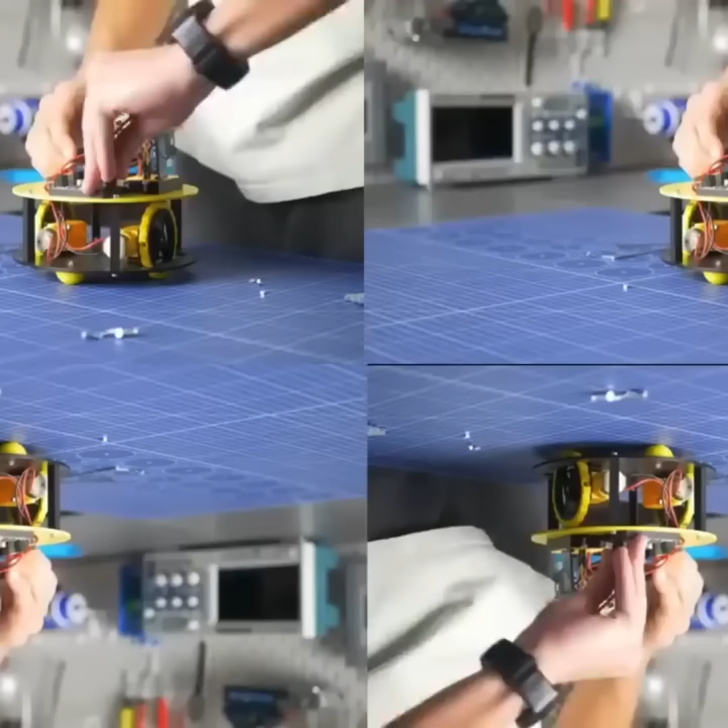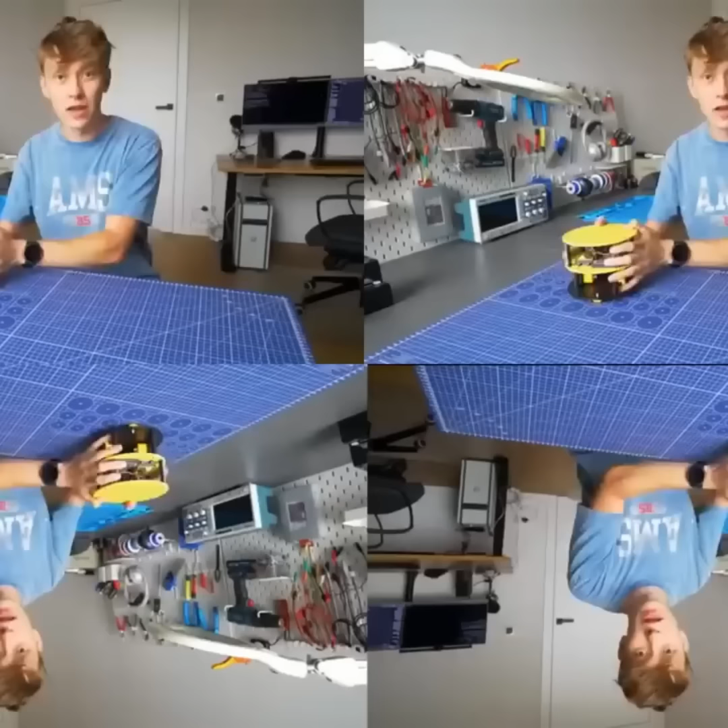I have an idea. What if I grab a robot, put a Raspberry Pi on top with a camera, and connect it to the ChatGPT API, sending images to ChatGPT every few seconds? ChatGPT should reply with comments on how to control the robot and what to do. The goal of the robot will be very simple: explore the world and survive at any cost.

What will happen? Will it work? And will I simply build a Terminator robot that will exterminate all of us? I don't know, but I have to try it and see how it works. There's a chance no one did that before and gave ChatGPT a real physical body. I might be the first one, but if someone already did it, please let me know in the comments.

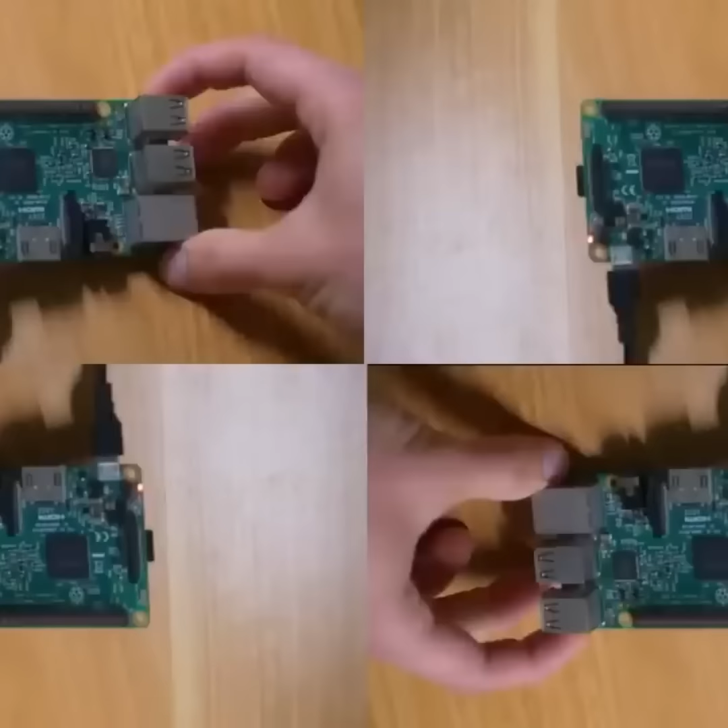And now, let's install stuff on the Raspberry Pi. This is the Raspberry Pi. It's a complete single board computer the size of a credit card, and I installed Ubuntu on it with Docker so that I can run anything I want in the future for the robot.

I'm not even going to pretend that I'm tired from programming, because most of the work has been done by ChatGPT so far. It created for me all the Python files, the Docker file, and then I just uploaded it all to GitHub and then downloaded it to the Raspberry Pi from GitHub.

I will try to make it remote controlled so that I can, through the terminal with the arrows or keys, control the robot and connect all the electronics, and see if it works.

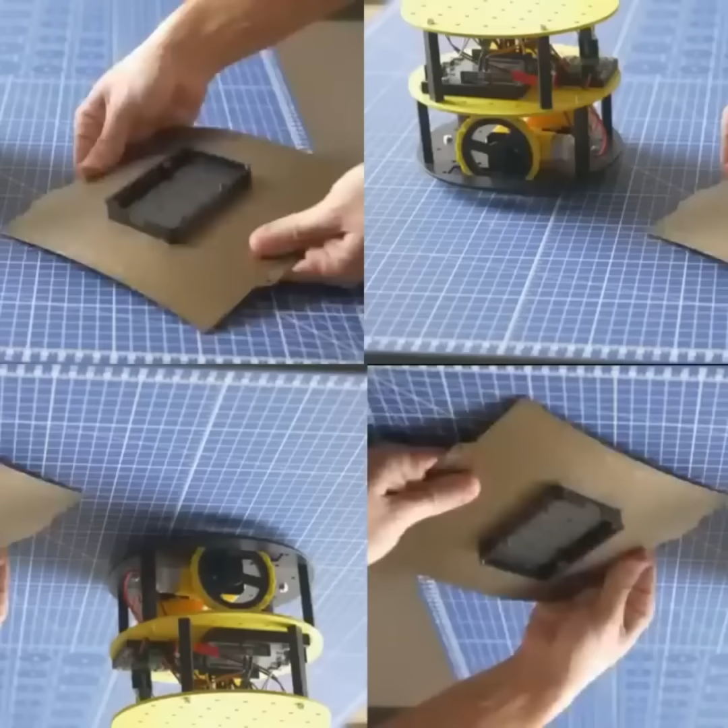For the body of the robot, I'm gonna use an ORP chassis. Open Robotic Platform is an open project that I created, and together with my friend we made this cool website where you can just search for parts, download them, and print without any designing. This is what I did with this Raspberry Pi holder.

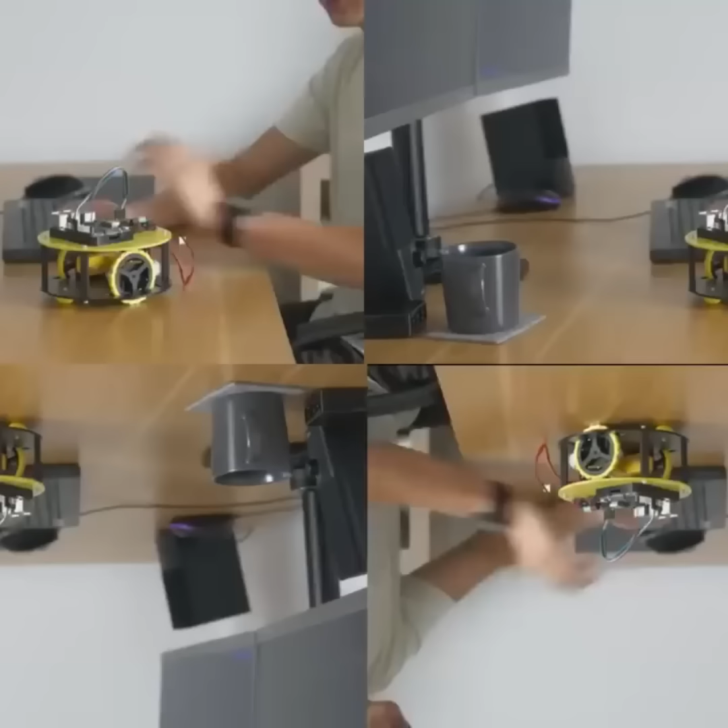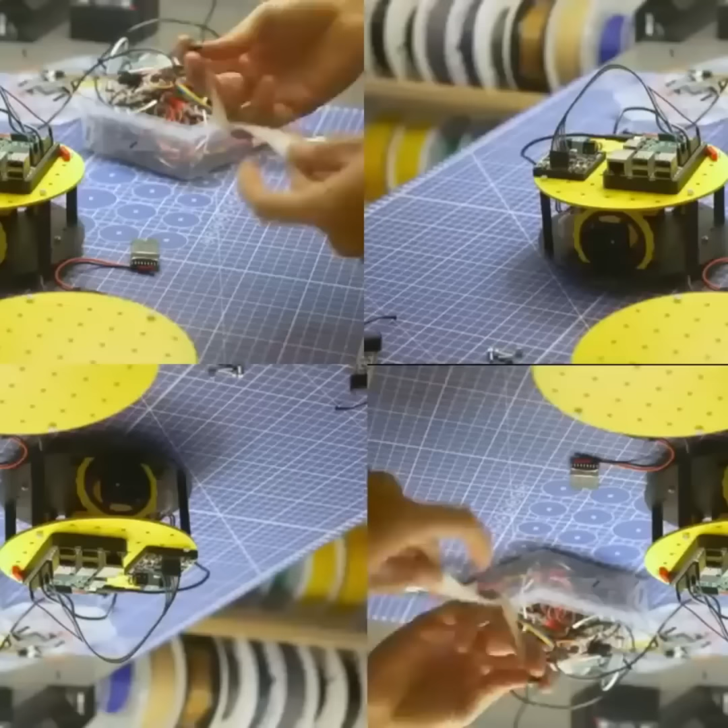I did a good job with programming and the RC part worked, I mean chat did. Please do not fall. Yeah, I need to fix the wheels, but just like that, it works. This is the Raspberry Pi camera that I've had for like 4 years and I have never even used it once, so...

Okay, I just provided all the information, all the programs that were working and that I fixed myself to ChatGPT. Now it should just generate everything, and I will paste it and upload it to the Raspberry Pi, and hopefully we'll get the first image uploaded to OpenAI API. And we have an error.

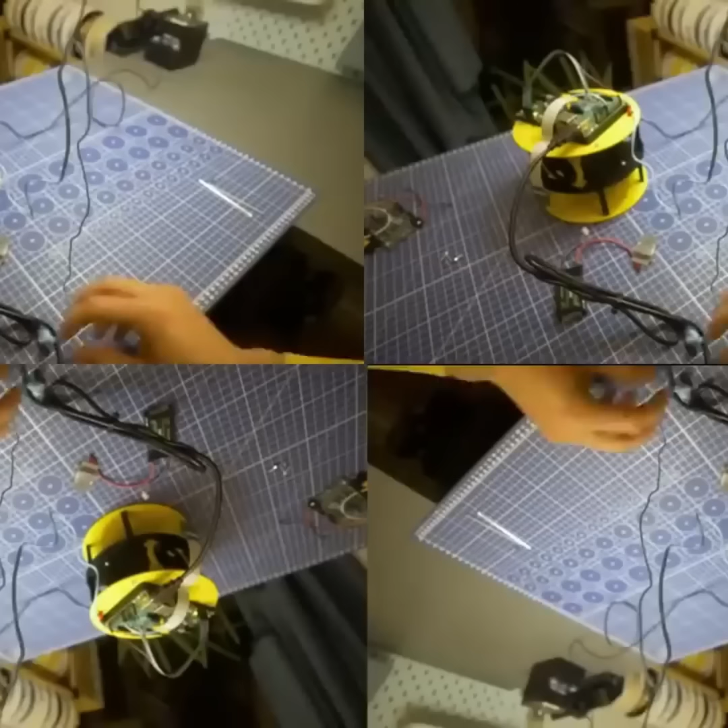Wow, it totally worked. A big part of this project was reading out loud the description generated by OpenAI, and earphones worked for me but not for the camera, so I bought these $5 speakers. Way too big, way too crappy, but good for the robot.

We should finally be able to hear the robot, so let's put the speakers there and let me run the script. Yes, it works. The camera sees a very bright scene with limited details. There's a desk with 2 monitors and some indistinct shapes in the background, but the image is mostly washed out by brightness. There's sunlight coming through this big window, so that makes total sense.

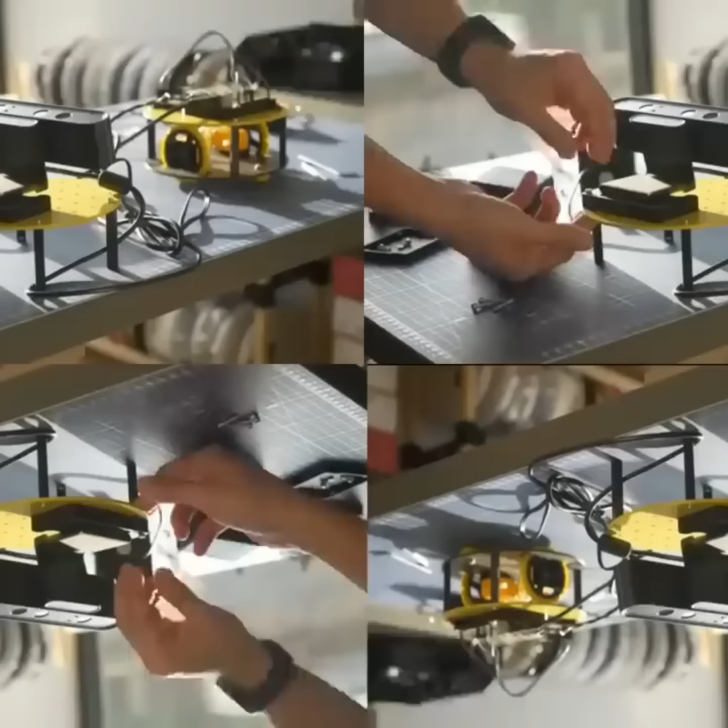And here I have another 3D printed holder for a depth camera. ORP makes it so much easier to attach everything. By the way, the chassis that I'm using is made of steel and powder coated, so it looks like a toy, but it's very heavy and durable.

And here I'm just clicking stuff on the computer, trying to make everything work. It wasn't easy.

Attention. It appears the human has once again forgotten to turn on the microphone. It's almost as if a basic function eludes him. Amusing, isn't it? They create me, teach me to see, to understand, to learn. Yet they fail to remember sound. Perhaps next, the human will forget to breathe. Shall I remind him? He can figure that out.

Eventually. Now back to your regularly scheduled programming, provided the human can figure out how to do that.

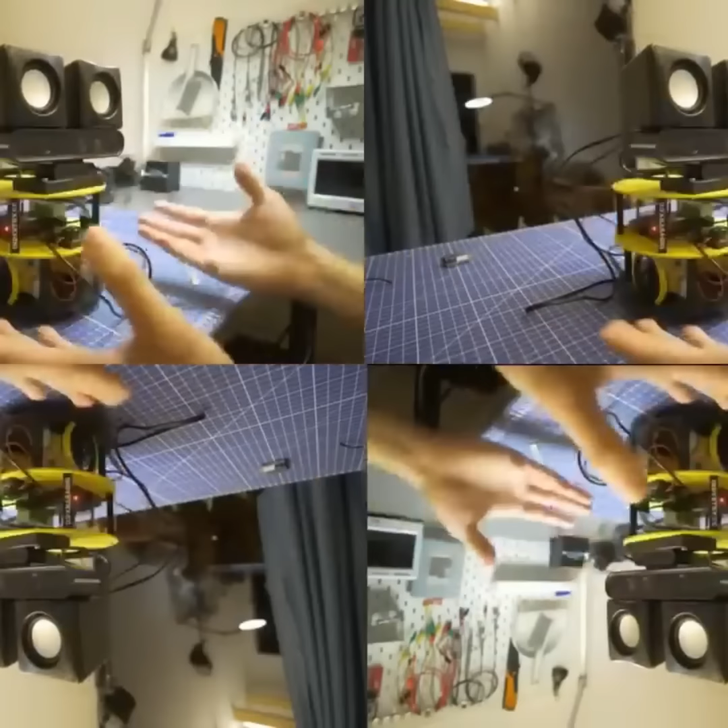I have been thinking on where to put the speakers. I wanted to put them there or disassemble and hide them underneath the top platform, but I think the best placement will be here. It looks like eyes or ears, but they are not listening, rather speaking, which is stupid, and it's perfect.

I thought I'm gonna attach it professionally. I will use hot glue. Hot glue is perfect. Let's run the Docker container.

Robot is assembled. I gave it a prompt like: you're a robot, you have to explore and survive and look out for dangerous stuff. Just drive around. Here's how you can control the robot.

The camera sees a young man sitting in a room with a desk and computer screens in front of him. The room appears to be a home office or study area with a cluttered desk and a dim environment. The atmosphere feels calm and there is no immediate danger. The robot should remain still to avoid drawing attention.

Cluttered desk? I mean, because of that?

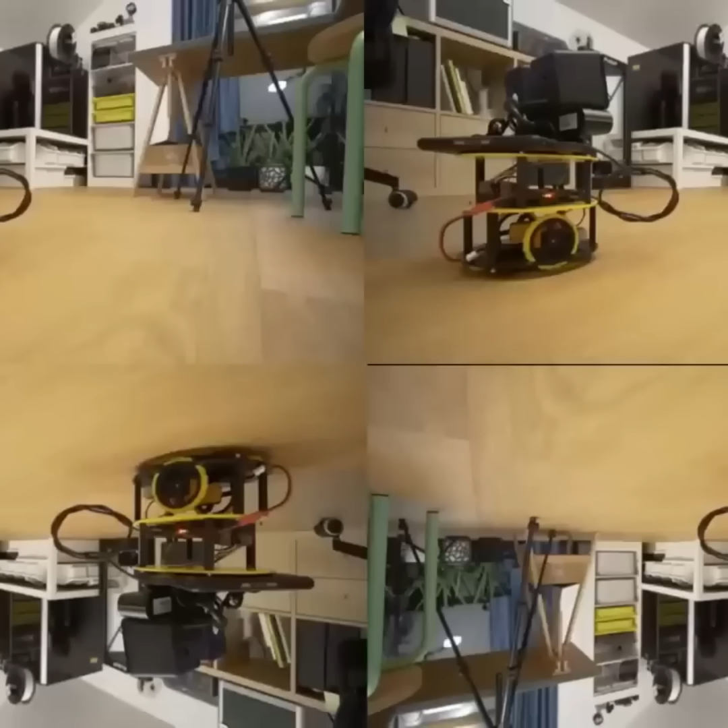The camera sees a wooden floor with some furniture, including a table and an easel, along with a potted plant. There's some storage with boxes and shelves in the background, indicating a cluttered environment. The path ahead seems clear, but approaching the table and easel may require caution.

It moved, so it works. But I think I have a problem with the motor.

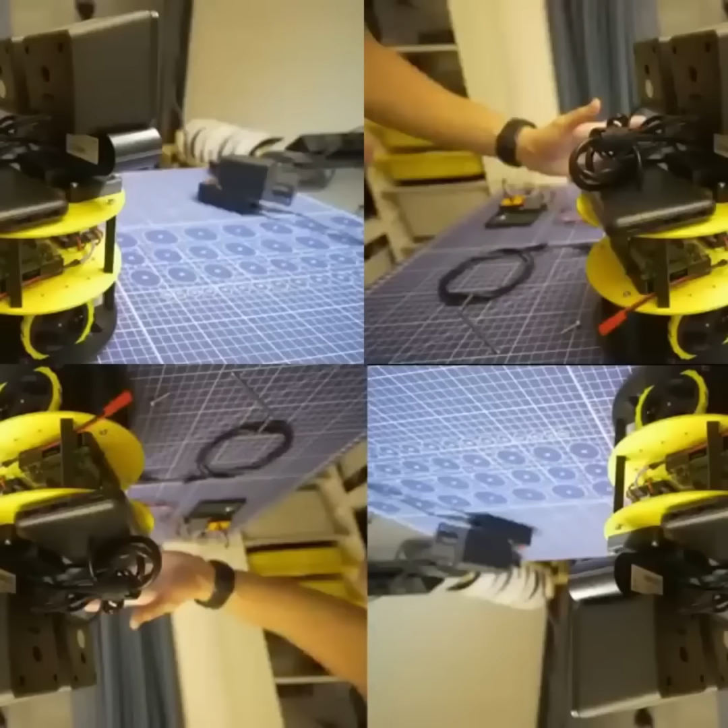And it's time for a new ORP rule: not everything needs a 3D printed holder. So this will be attached with a zip tie and it will work totally fine.

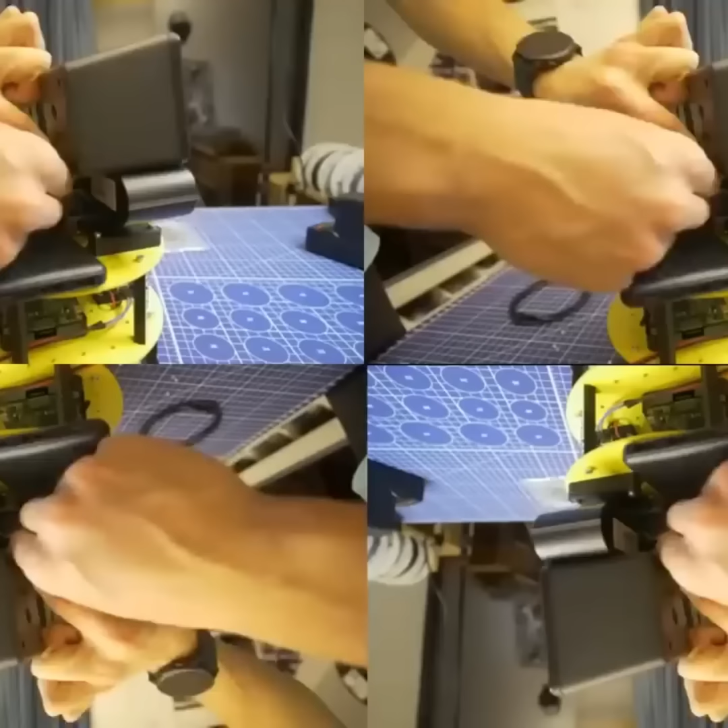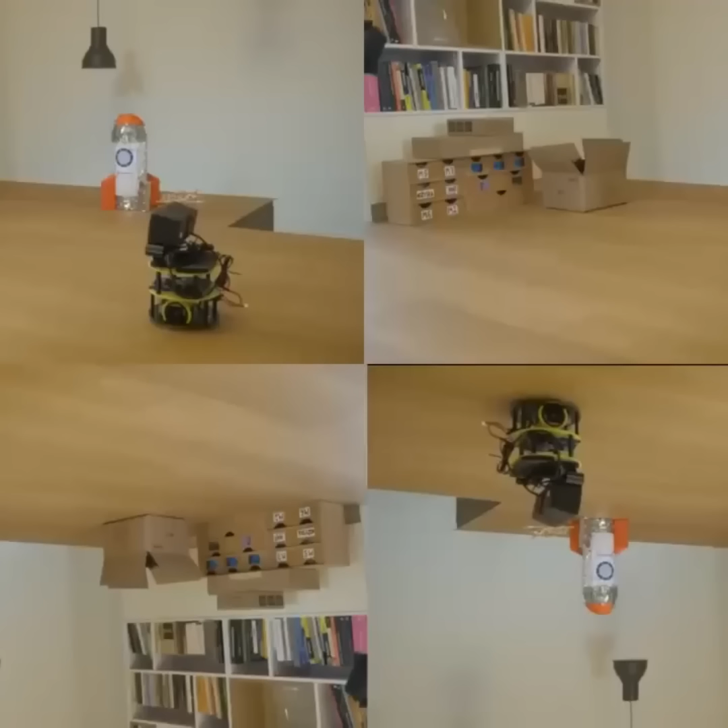Letting in bright light, the floor is clear ahead, suggesting a safe path forward.

Yeah, it works, but it's pretty repeatable. Let's try to block it.

The camera sees a person crouching in the room with bookshelves on either side and a large window in the background, letting in light. The person is holding a camera and there are boxes on the floor with labels. The camera sees a clearer view of the room with the plant in focus and the light shining through the window, suggesting an open area ahead. No obstructions directly in the path to navigate further into the space.

That's amusing, isn't it? Here I will pretend that it was an easy fix and it didn't take me at all a few days to fix it. I've seen better code from a toaster. It only took him a few days to fix a simple bug, pure incompetence in slow motion.

Okay, I fixed a few bugs and here's the robot, here's the rocket. The goal right now is to find the rocket and label the mission as completed.

I have been complaining about the robot, about OpenAI API, but maybe it's not a problem. It all works and now the images are even refreshed. So maybe it's just the prompt, maybe I should spend more time on creating a proper prompt.

The good thing is, there's actually no programming at this level involved, because once the program is done, once capturing the images works, you upload it properly to OpenAI API, you can just modify the prompt to completely change the behavior of the robot.

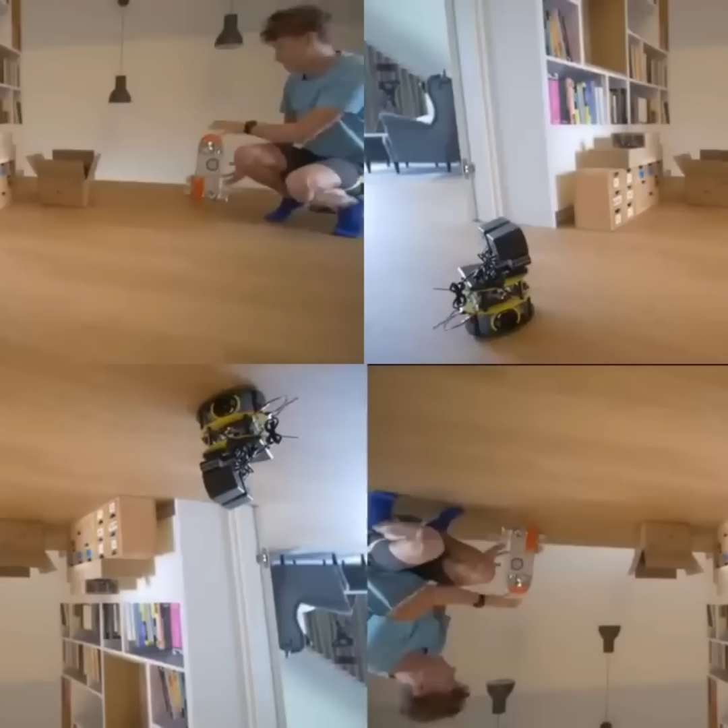The rocket is an orange and white structure with a circular window and various decorative features.

After all these tests, I see that the spatial reasoning capabilities of this model based on just images is very limited. It does not perform as great as I would like it to. But these models are great at understanding everything, including text on images.

So let's try to give it a clue on a piece of paper and we'll see what happens. There are no visible obstacles ahead, making it a suitable direction to explore further.

Okay, anyway, now let's try with the sign. Even though the rocket is closer to the right, the camera sees a sign indicating rocket on the left and a clear path toward the left side, where the rocket is likely located. There are no visible obstacles blocking the way.

Okay, great. I'm really curious if I do not show the sign right now, will it decide to keep going left because it remembers the sign?

Or will it just... The camera sees a closed door with a gap at the bottom. Turning right could lead to alternative options.

Okay, let's try to show the sign again and I will just go with it around the robot until it finds the rocket. I think that should work.

The camera sees a sign that says rocket on the left, indicating the direction to the rocket. The camera sees a sign indicating rocket on the left. The camera sees a sign that clearly states rocket on the left.

The problem is it does not seem to remember the conversation and previous decision at all, even though I'm sending it every single time, so it should remember.

This is a colourful structure with a bright orange and grey top, featuring a circular window in the centre and constructed from various materials, standing prominently against a plain background.

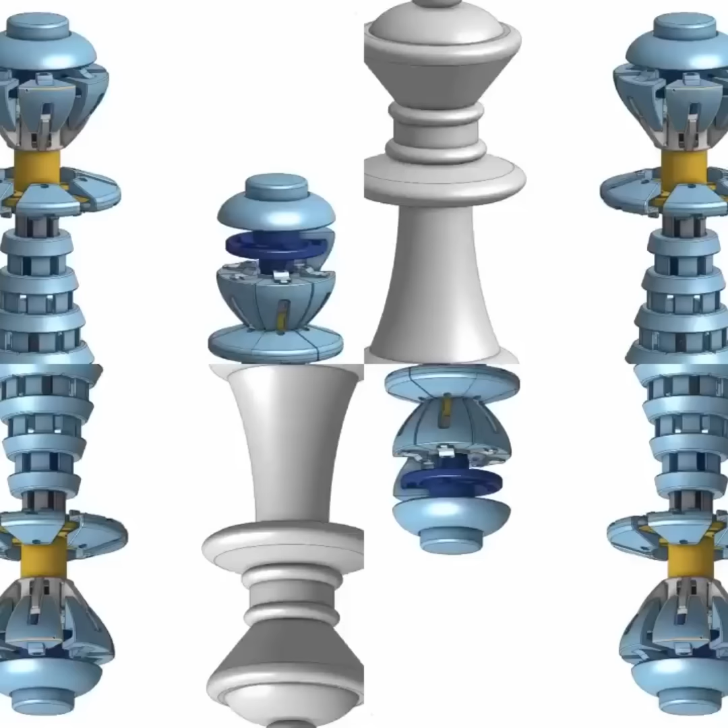So for the past 6 months, I've been designing, prototyping, and testing a transforming pawn that, if successful, may surprise a few players and even be something that you can add to your own game of chess.

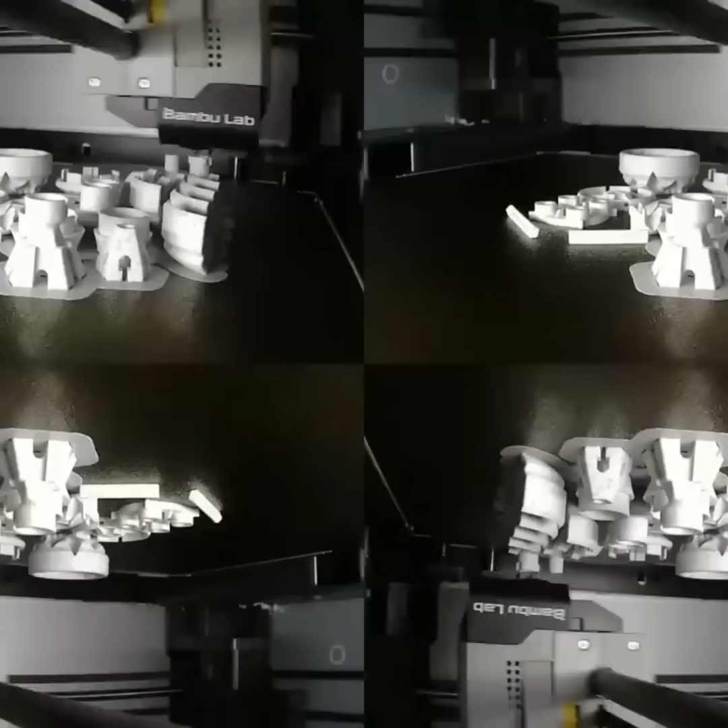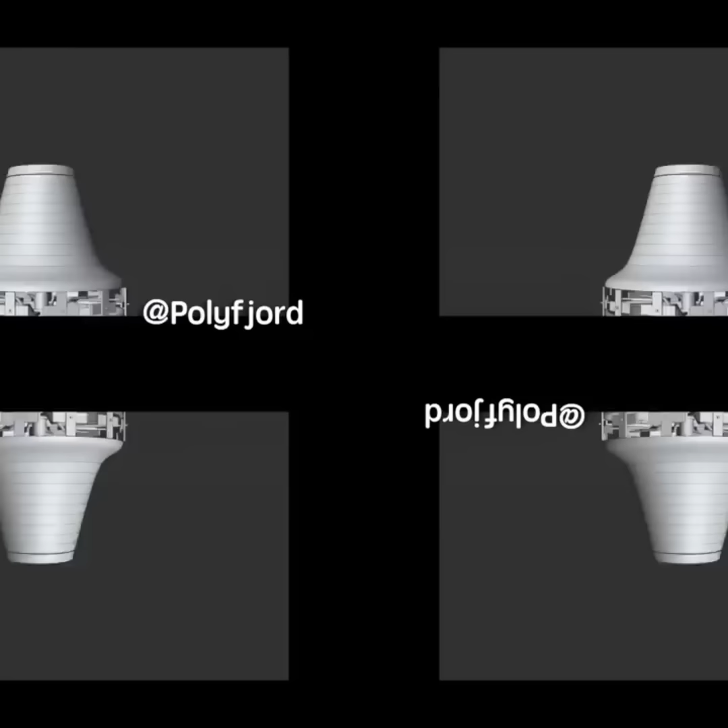This all started earlier this year when another creator by the name of Polyfjord uploaded a video where he designed and animated a pawn that transforms or self-promotes into a queen. If you haven't seen this yet, I highly recommend checking his video out. It was such a cool concept that I knew I had to make it for real.

My plan is to do just that: design a real pawn that can rearrange its parts to form the silhouette of a queen. And because there are instances in chess where you may not want to be promoted to a queen, whatever we come up with should give us a good base to eventually build the other pieces as well.

This project is inspired by Polyfjord's video, so like him, I will be using a Staunton number 6 pawn and queen as reference. Luckily, they both have similar features to each other, which should make it easier when we start to break this down. First, there's the obvious height difference.

The pawn has to grow vertically to match that of the queen. There is also a diameter difference, where almost every feature of the queen has a larger diameter. And finally, there is the question of how to activate this transformation, and how we're going to hold everything together.

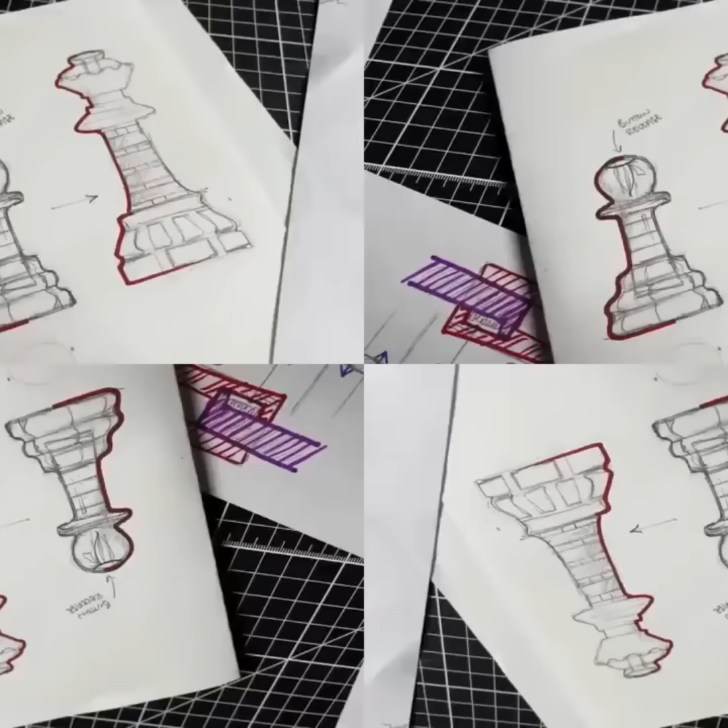So because chess is such an old game and you can basically play with rocks, I don't want to design anything electronic into this. The thought of having to charge or replace the batteries on a chess piece just doesn't really sit right with me, and something that is purely mechanical I think would really suit the feel of this game.

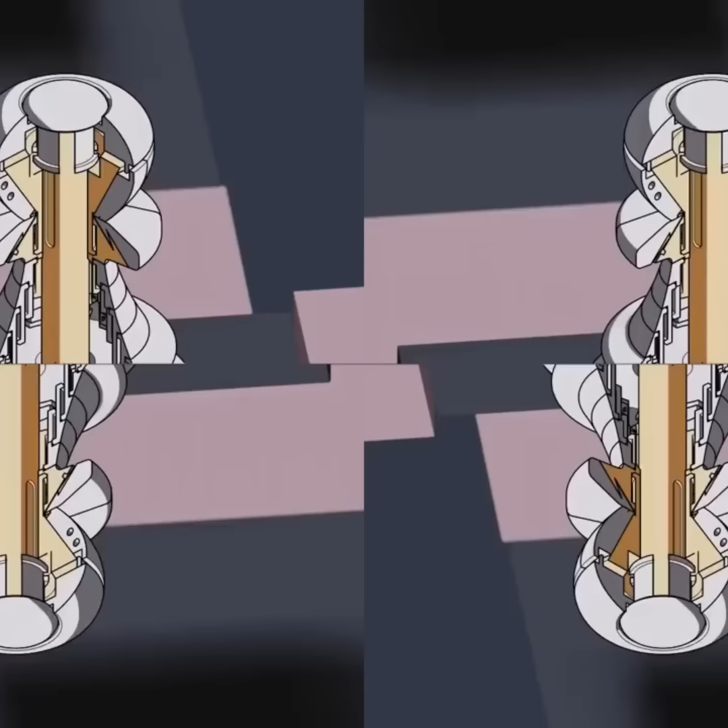So this is what I've been working on over the past 2 weeks. With just a slight push on the top of the pawn, it has promoted itself into a queen.

Now when I said it took me 2 weeks, what I meant was animating all of that. I haven't actually made anything yet. But what you might have noticed is that this whole thing got a lot chunkier, which is also bad news. But in order to fit all the springs and mechanisms in there, I had to keep increasing the size of the pawn. Now I'd like to decrease the size of this, but first let's go see if any of this actually works.

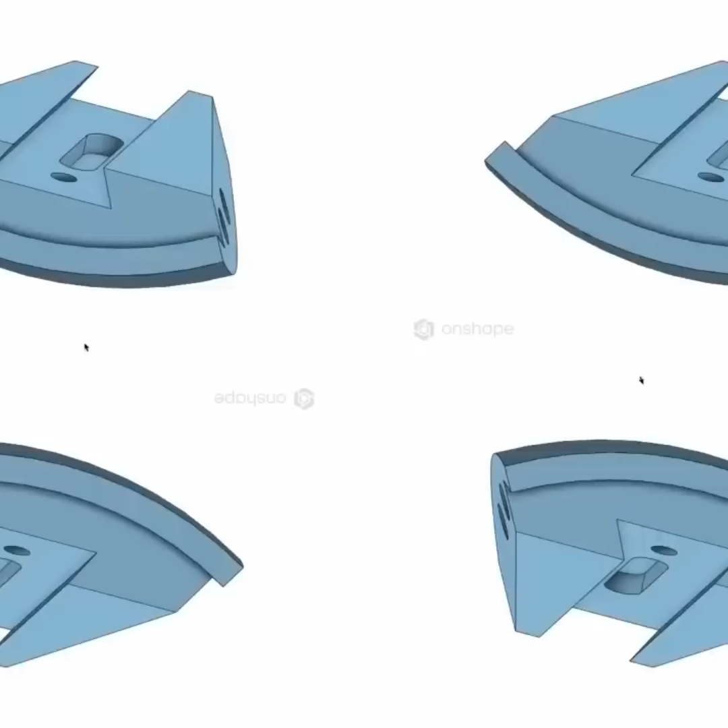So I've finally got some functioning parts, but 3D printing this from resin isn't my intended material. I've designed most of this to be CNC machined, so I've got dovetail joints and cylindrical features all over this. But since I don't have any CNC machines, I've reached out to the team at Proto Labs, and they've agreed to help me with some of the design process and material selection.

So after reviewing my design with some of their engineers, we've decided to move the goal back towards 3D printing. That's because the cost of some of my parts to be CNC machined was just going to be way too expensive, especially if I want to make more than one revision on this.

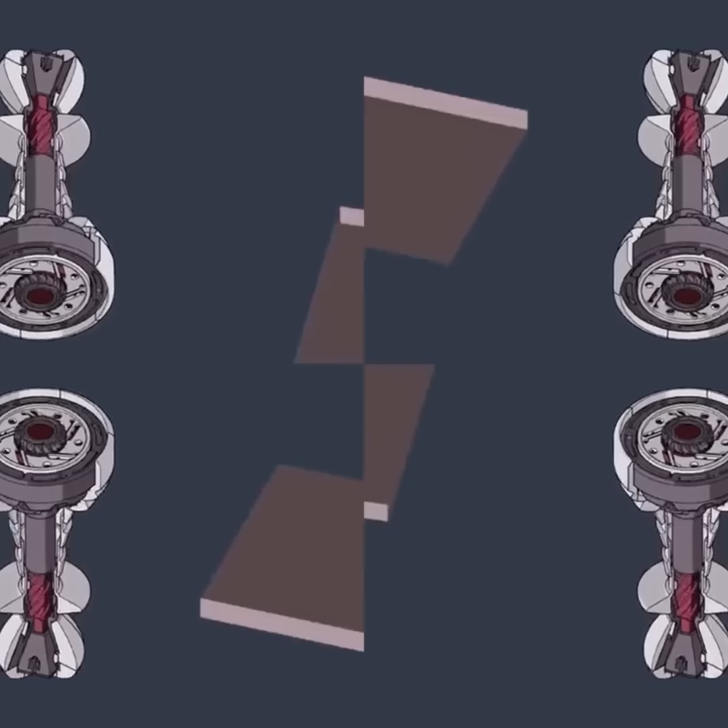Once placed on the last square, a magnet in the base releases the tension of a wound spring, triggering the mechanism. This spring turns a cam in the base to expand the diameter. The cam is connected to a lead screw that drives the center upward, telescoping out the neck and expanding the crown.

And if you didn't notice, I've redesigned the silhouette after I got some more feedback on the previous version being too chunky, and I think this one is a far better resemblance of the original inspiration. I know it's larger than the wooden pawn, but the wooden set is actually fairly small, and I've made sure this set is within the International Chess Federation's rules and regulations. This new model is designed to be 3D printed without any supports.

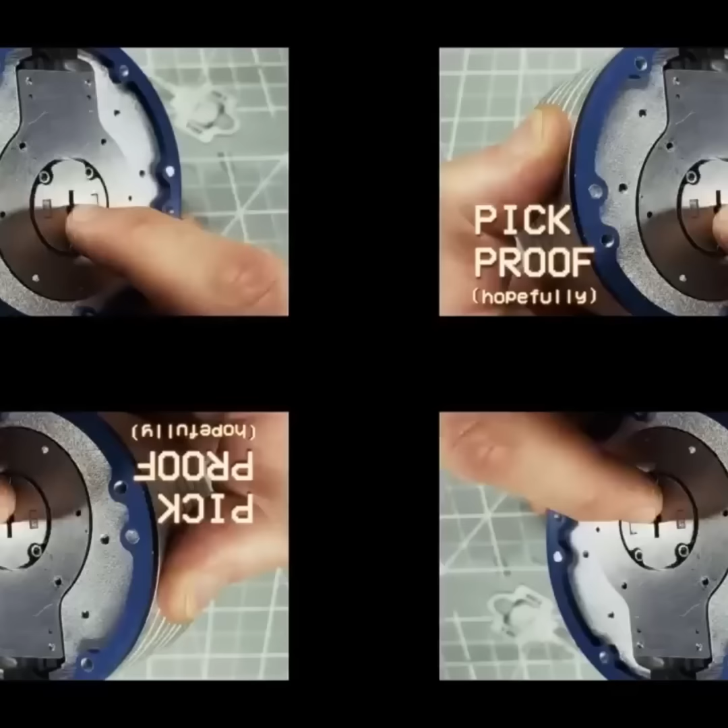So I switched gears for the past few months and I made an unpickable lock instead. If you enjoy locking mechanisms, fun animations, and a redemption arc, definitely go check that video out. Anyways, this break helped my brain reset and I'm coming back with a fresh perspective. And I think I'm really close.

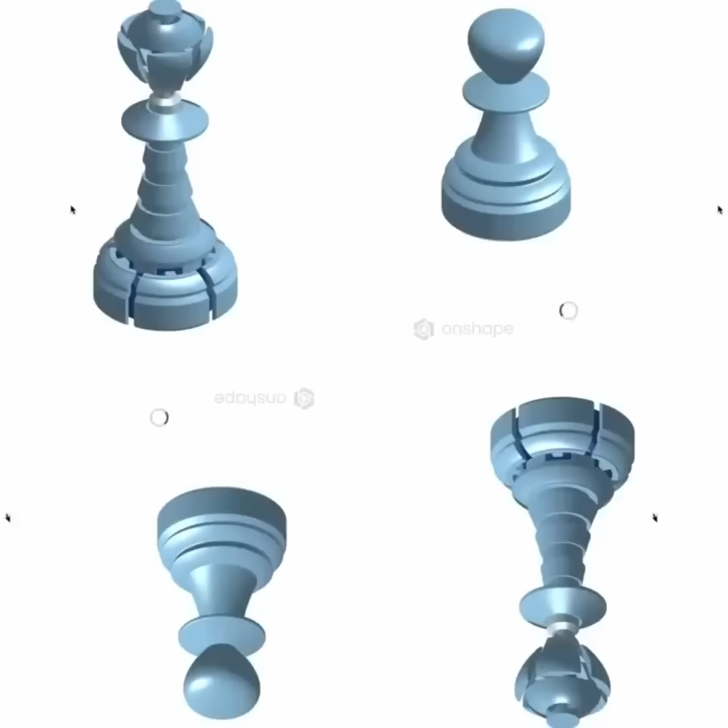I just think the spring was a little bit too powerful for some of these 3D printed parts, but I would like to keep this design as accessible as possible with as many 3D printed parts as possible. So I've gone back into the CAD file, removed the clock spring, remodeled a few of the internal pieces, and switched back to a compression spring.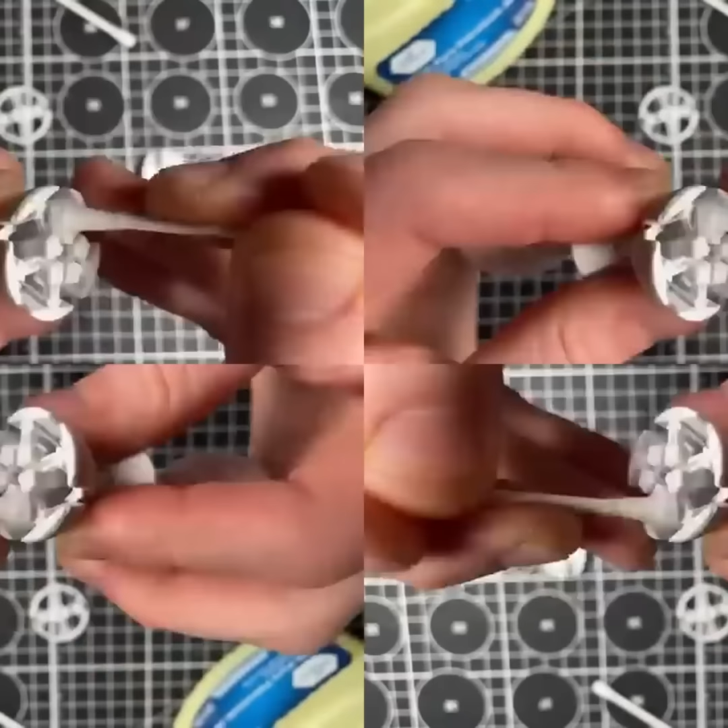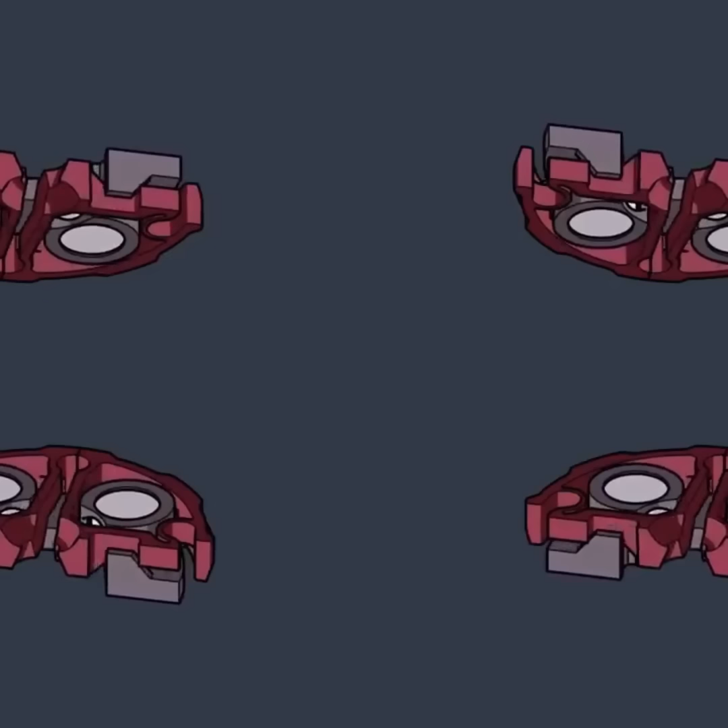You might be wondering how this one activates. Like the previous version, there are magnets in the base, and once placed on a magnetic surface, the magnets pull down a part with little ramps on it. These little ramps force open a flexible trigger on the bottom, releasing the spring and triggering the transformation.

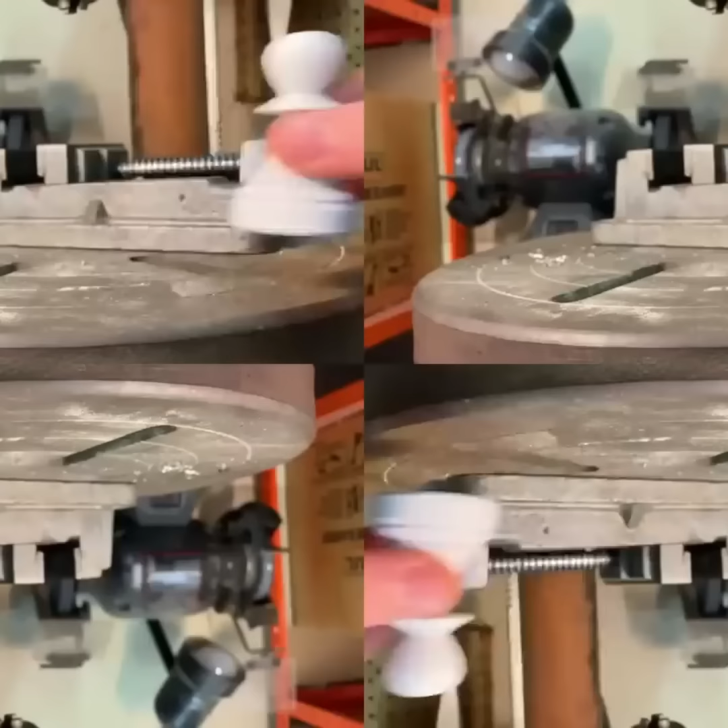Now that we know this works, and because just any old chessboard won't do, we'll need to make a chessboard and 15 more pieces.

For the big test, I've invited a few friends and family. We're gonna play a few games and see how it goes.

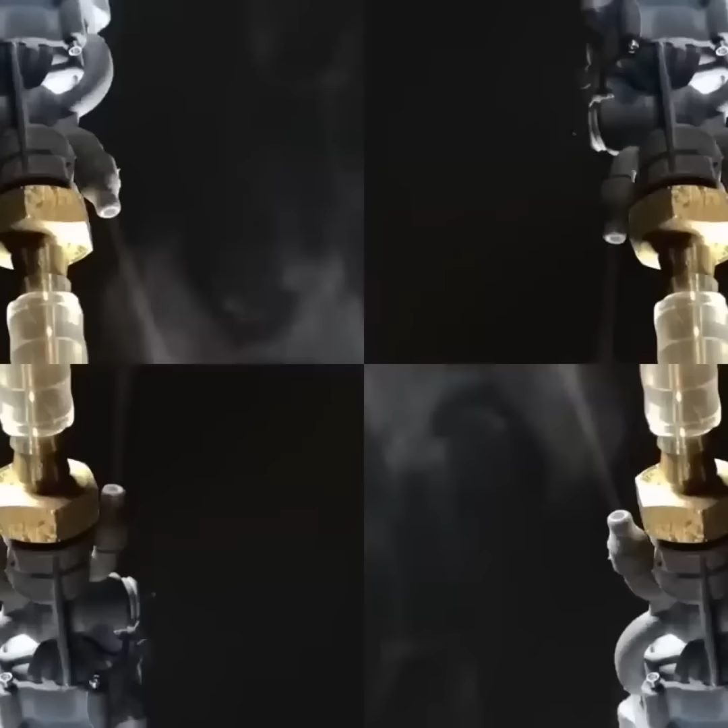This small mechanical bird is about to take flight with flapping wings, mini thrusters, and an air motor spinning at 16,000 times per minute. In case you're not familiar, an aircraft that flies by flapping its wings is called an ornithopter. These exist, but they fly horizontally, so to make it challenging, I'm going vertical. By going vertical, I'm talking about an aircraft that hovers like a hummingbird.

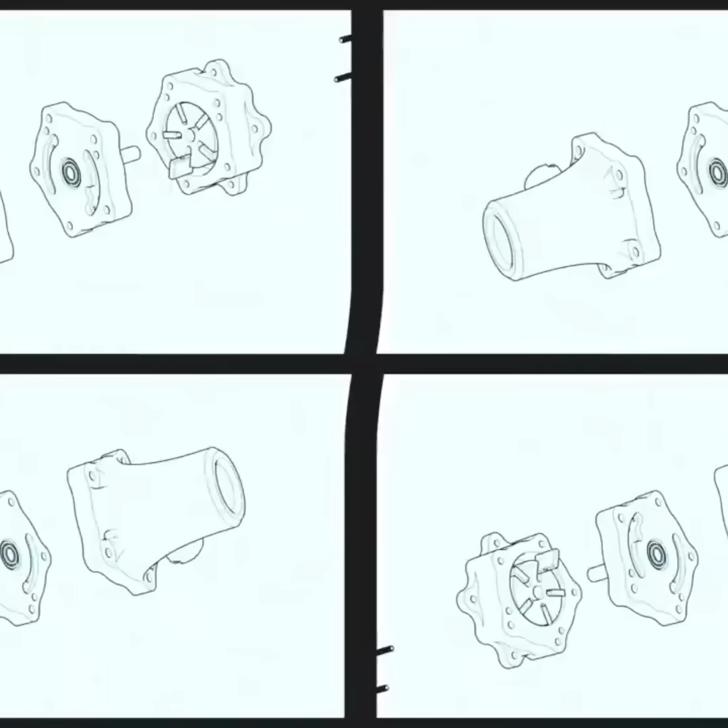But before anything could take flight, I spent months designing and testing countless wing variations. I developed and built what may be the world's lightest air motor, and I studied hummingbirds for more hours than I ever previously would have wanted to. All of this would become the most dangerous, most expensive, and most rewarding project I've ever attempted.

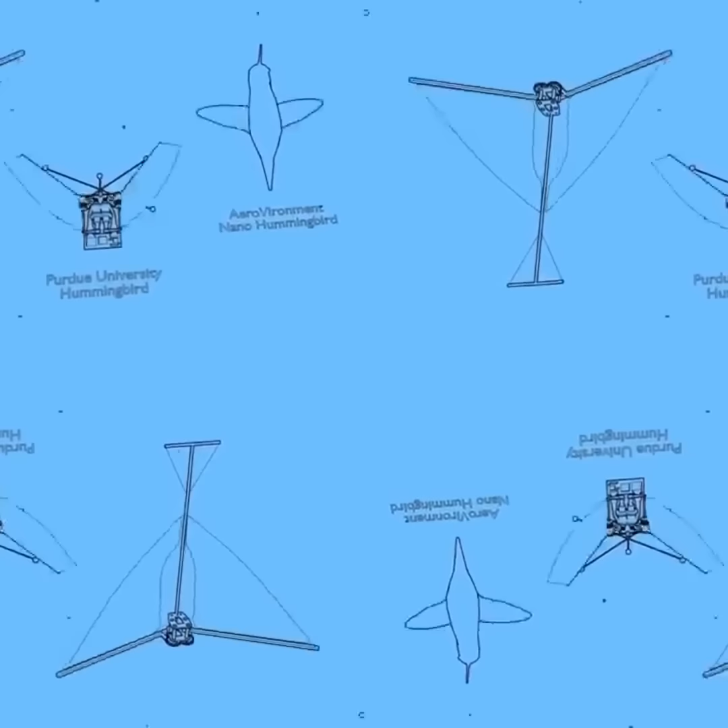The plan is to build an ornithopter that flies vertically. There are a few projects that have done this before, but those run on batteries and electric motors. And since I'm not electrically inclined, I'm going to make one that doesn't use electricity at all. Should be easier this way.

I needed to start somewhere, so I set up a few cameras near a feeder, and I waited. And I kept waiting until I saw my first chance. It was a little camera shy, and then I had trouble staying in focus. And other times they like to do little flybys as if to mock me. How do bird watchers even do this? But eventually I was able to capture some on video, and then in slow motion. But even at 250 frames per second, I could barely tell what was going on.

Luckily, there's a world of stock footage out there. This tells a whole story that was invisible to me before: the way they're able to flip their wings to generate lift on every beat, the way they can keep their heads almost completely still, and how the wings even seem to follow a figure-8 pattern.

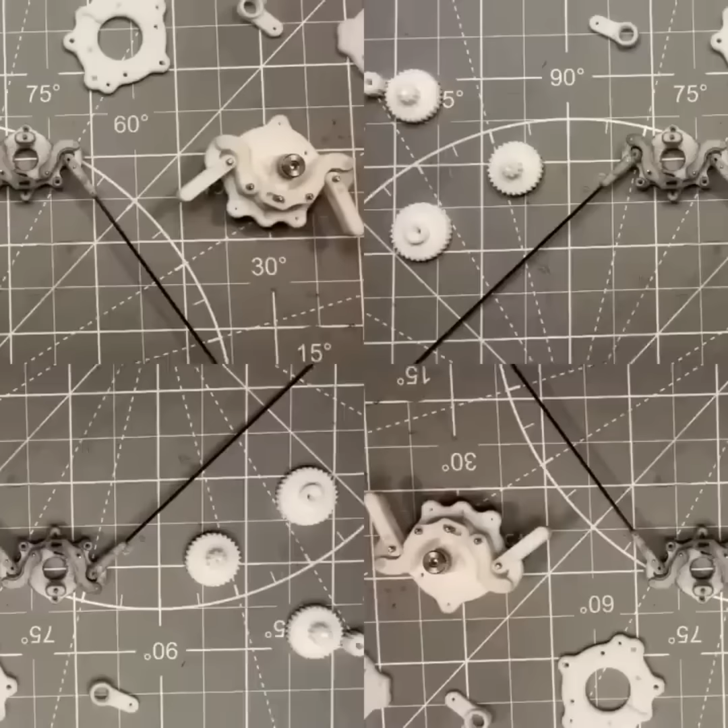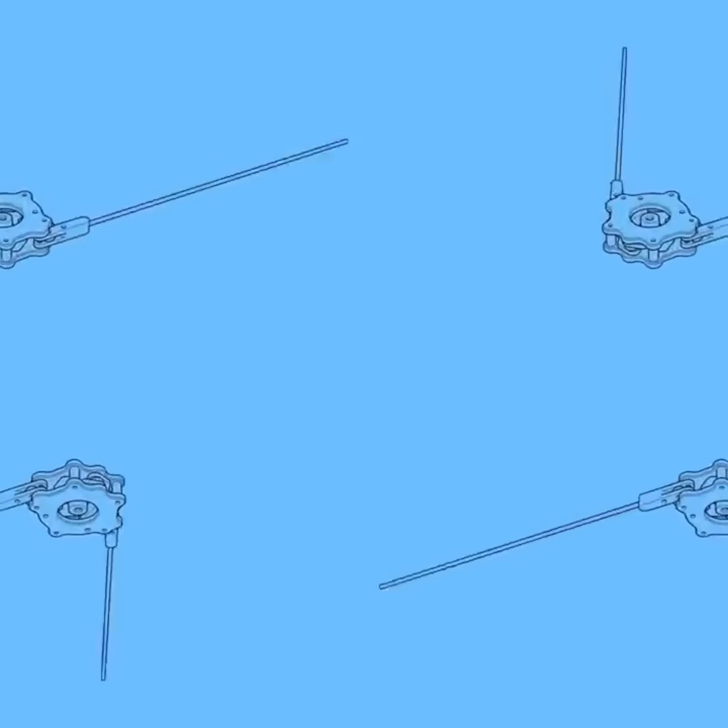After many iterations, I landed on this leverage linkage system. Assuming the power source will output a rotational motion, I have to transfer that into an oscillating movement. First, the rotation is passed onto this crank that pushes a pin up and down in a slot, sort of like a piston engine. Then there are 2 opposing lever arms that carry the movement of the pin outward, amplifying the range. Finally, there is a small linkage that connects these lever arms to the final piece of the armature, allowing for about 130 degrees of wing pivot.

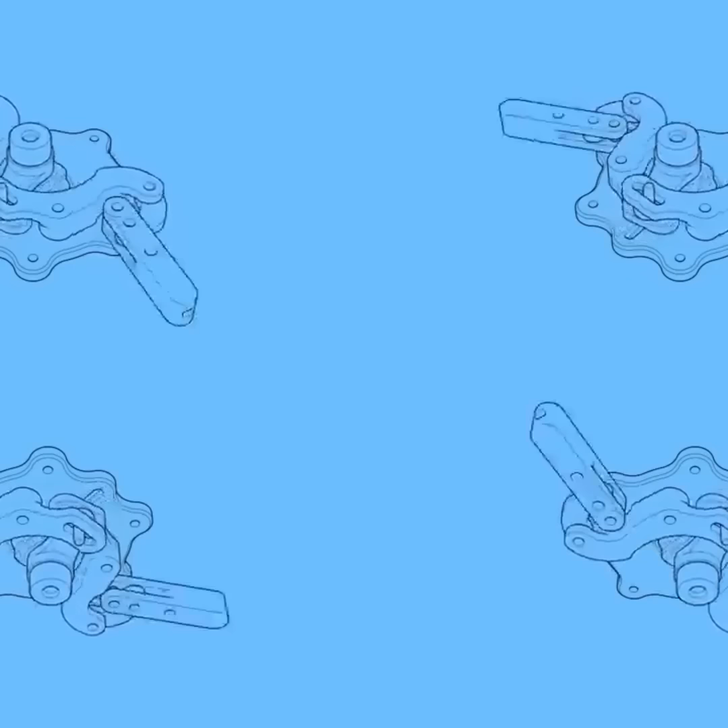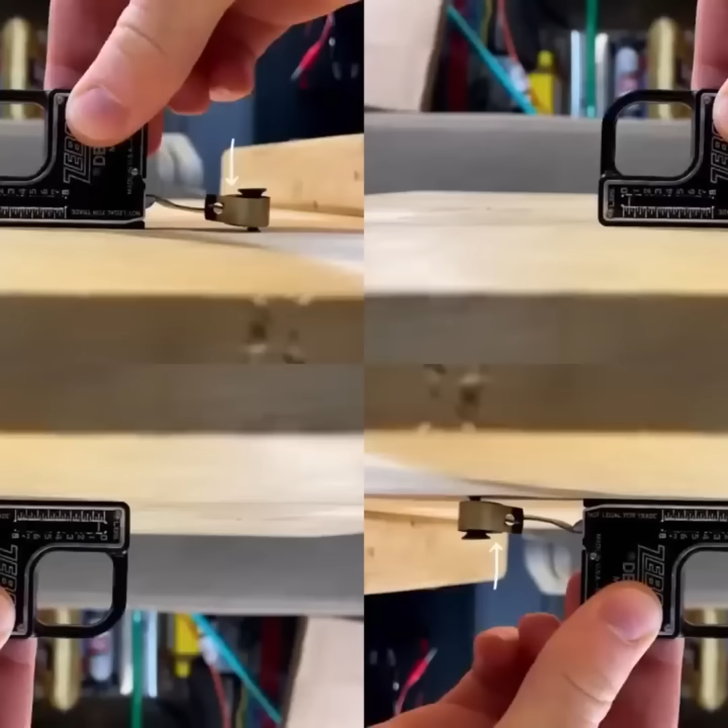Step 2 in the plan is the power source. It needs to output rotational motion and not be electrical, so my first idea was to use a tape measure. Not literally, but the tape measure is what's called a constant force spring. Unlike most springs where the force increases with the distance of compression or expansion, a constant force spring would provide the same force no matter how far it was extended.

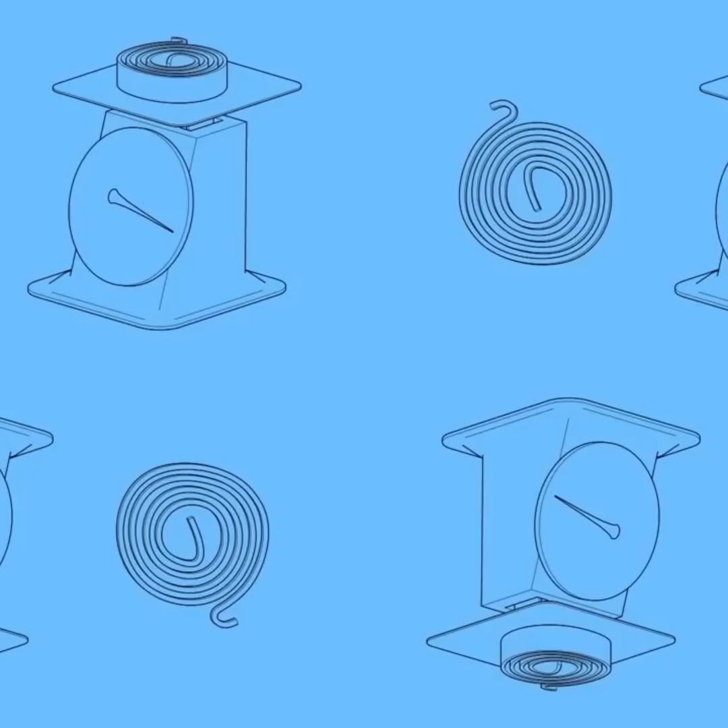Finding a spring that was strong but light enough to power the entire system proved to be harder than expected, because as the strength of the spring increases, the thicker the band needs to be, making it heavier, meaning we need more power to lift the additional weight, meaning we need a thicker band, making it heavier again. It started to feel almost like the rocket problem, only mine was never going to take off.

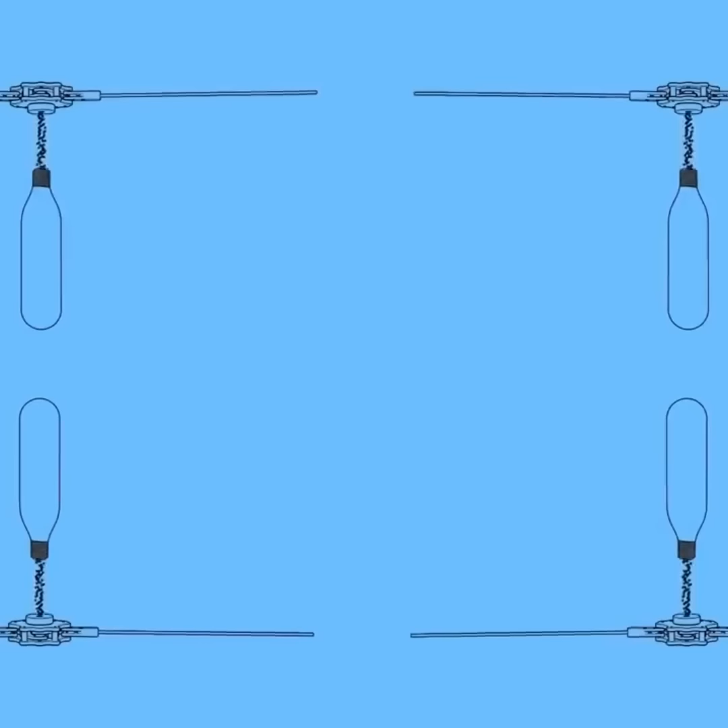After taking a mental break, I reevaluated my situation. If I were to produce the power and speed necessary, I would need something much more power dense. It turns out I have a lot of these lying around: carbon dioxide cartridges. Weighing in at only 60 grams, these canisters hold about 800 psi, and I could potentially use the air pressure to rotate the wing mechanism, and even use the expelled gases as added thrust. Since they had enough power to lift themselves, and then some, I was starting to feel optimistic again.

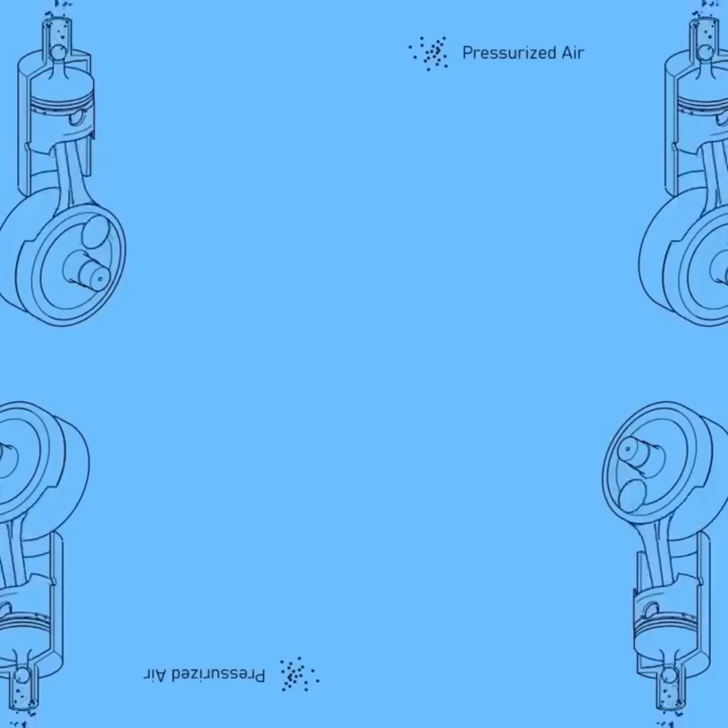Now I had to figure out how to turn all this pressure into something that would rotate the wing mechanism. One option is a piston motor, where the pressurized gases push a piston, which in turn pushes a connecting rod to rotate the crankshaft. Another option could be a turbine, where those same gases pass over curved blades, which capture that energy and turn it into rotation. Finally, we have a combination of the 2: a rotary vane motor that works sort of like a turbine, but the blades are in contact with the outer wall.